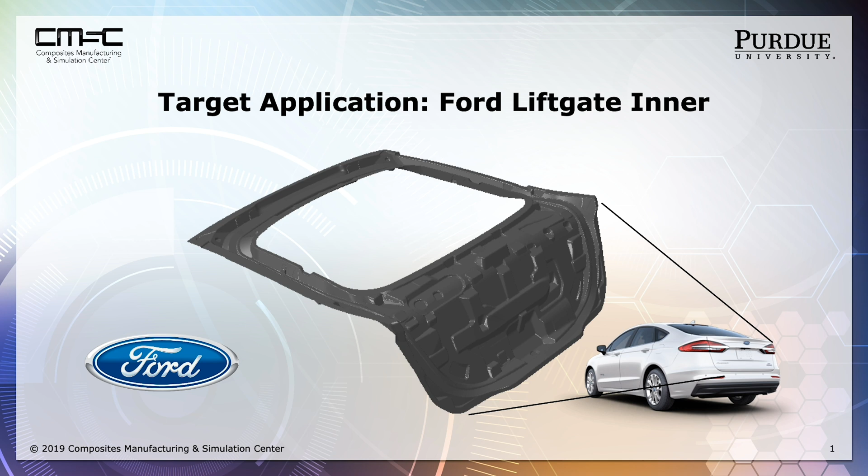Purdue-CMSC worked with Ford and Dow Automotive to develop a liftgate for a future SUV from carbon fiber composites. The goal of the project was to reduce weight while producing a structural part in less than 3 minutes.

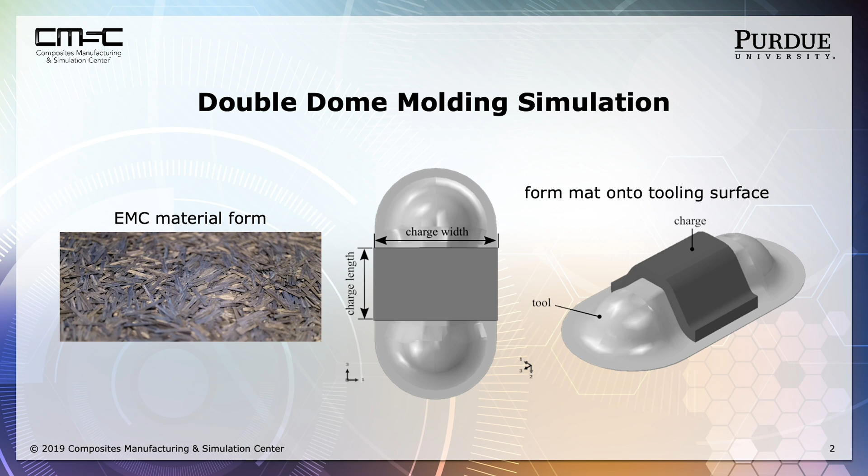Dow Automotive provided rapid cure epoxy systems, and Purdue guided the development of a molding compound with a balance of high flow characteristics with the strength of aluminum.

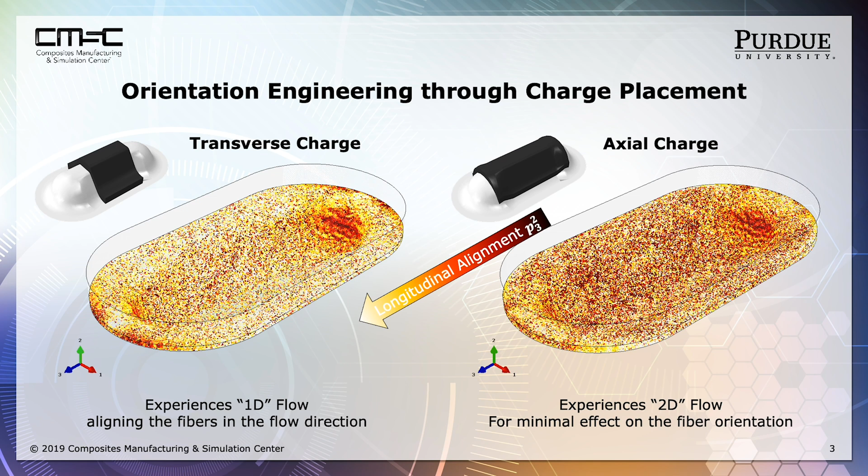Flow simulation at CMSC succeeded in modeling anisotropy and viscosity of these new material systems and in optimizing charge patterns within large compression presses typical in these systems.

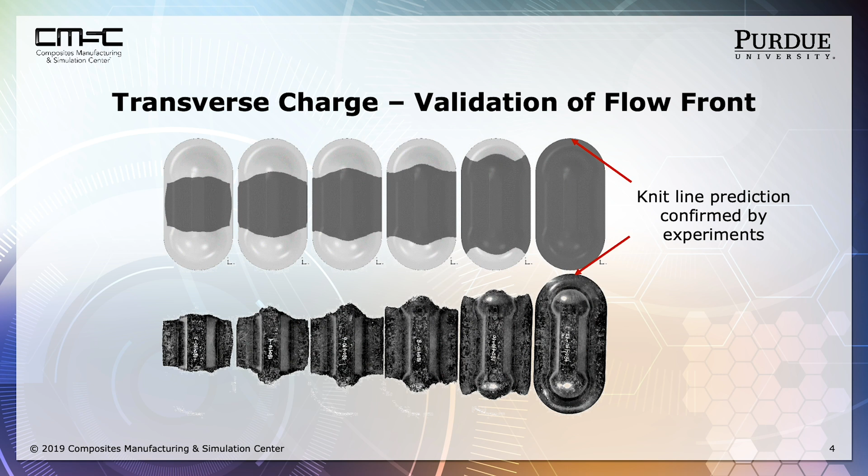The first liftgate prototypes were molded at Continental Structural Plastics in Huntington, Indiana, while CMSC's partner at the IACMI scale-up facility in Detroit, Michigan, provided multiple molding study results.

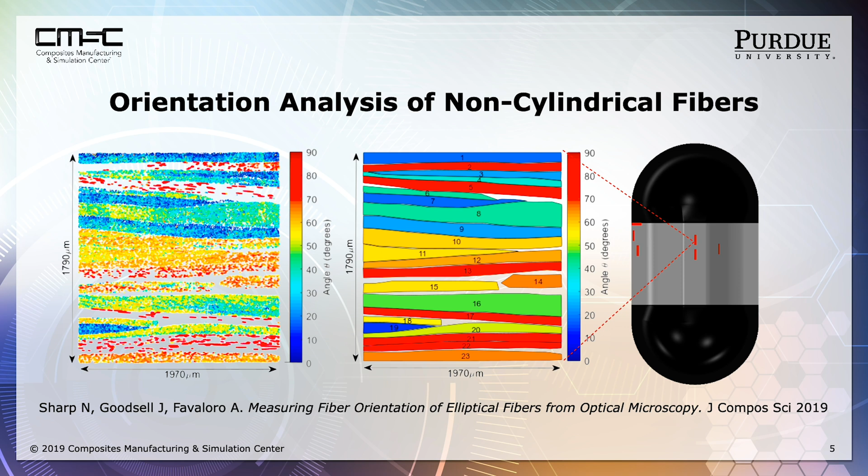The project made Dow Automotive Systems a PACE Award finalist in 2018 for processing speed and recyclability needed to utilize carbon fiber composites in mass production.

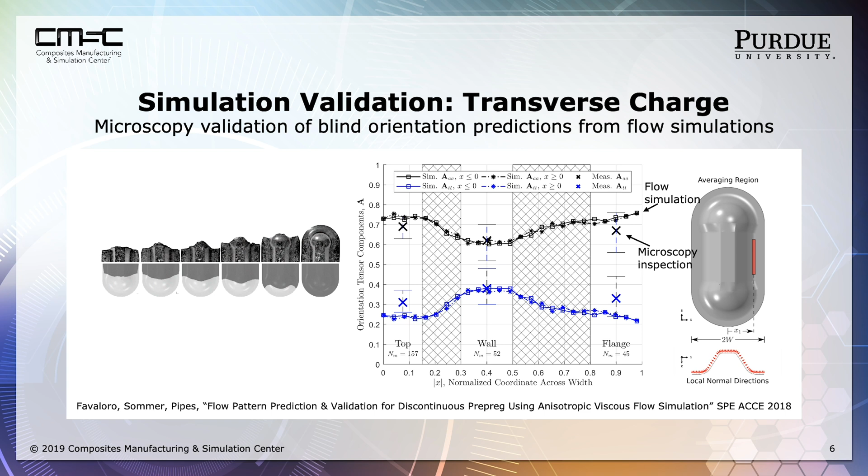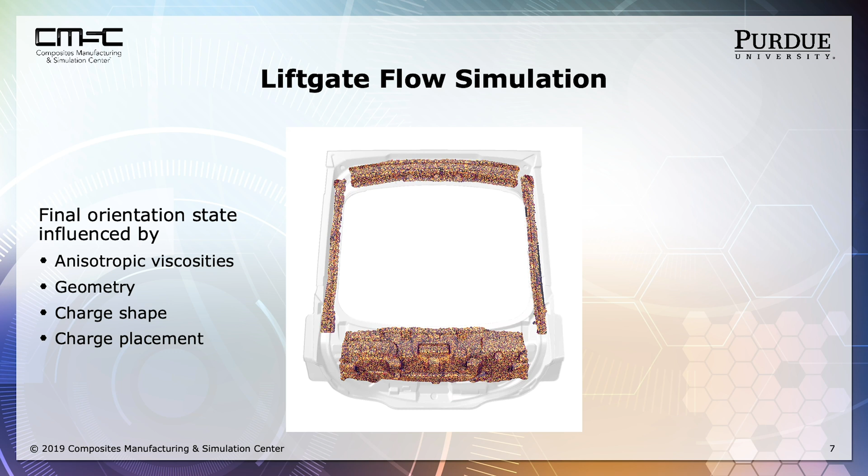The manufacture of carbon fiber composites with compression molding requires the machining of molds, typically in steel, of identical geometry as the desired part, and cost of these molds can be prohibitive when multiple part geometries must be investigated to achieve optimum geometries. The virtual twin concept can predict the optimum mold geometry and thereby reduce the cost significantly.

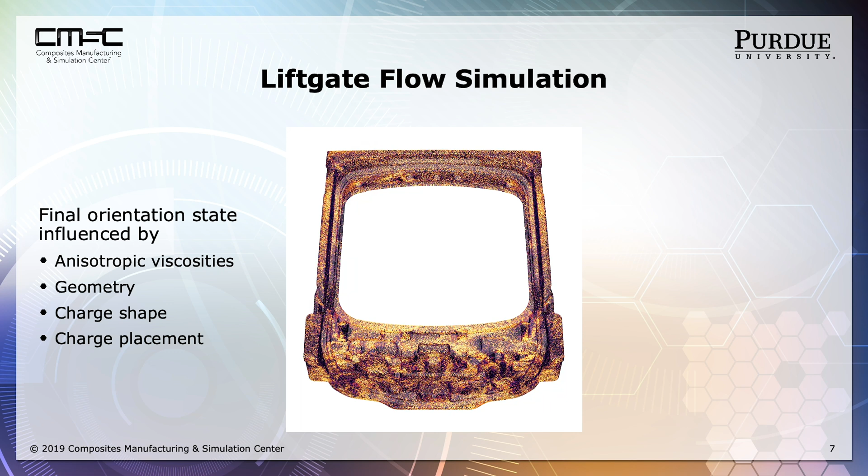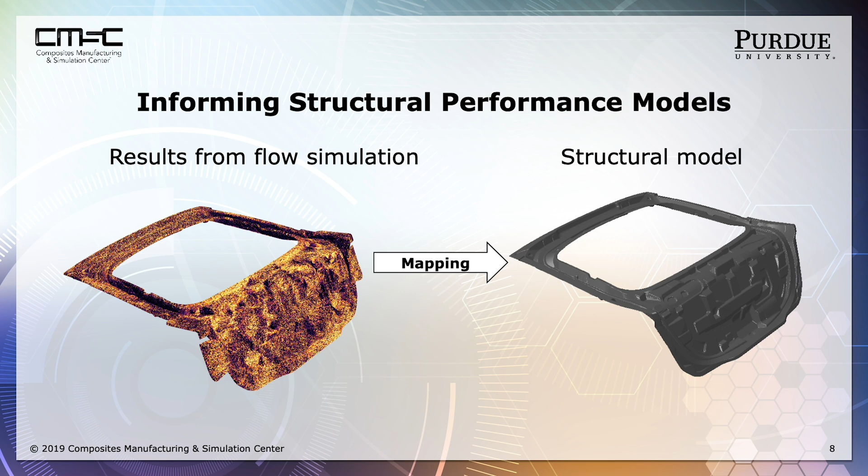A second development presented earlier is composites additive manufacturing. This process allows printing of the molds to achieve prototype geometries at significantly lower cost and mold production time.

The major cost, however, in developing new composite products or materials is in the expense of testing thousands of material samples to determine design allowables.

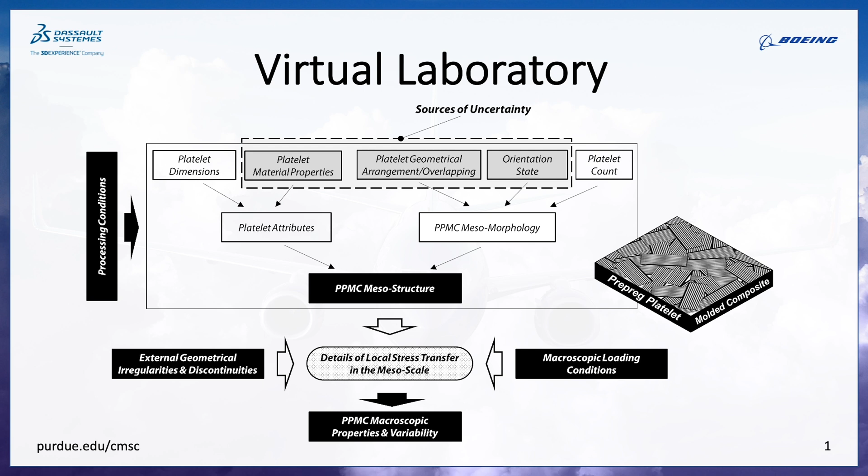Virtual allowables offer the opportunity to provide these data through digital twins of accepted test methods administered by standards organizations like ASTM, SAE, and others.

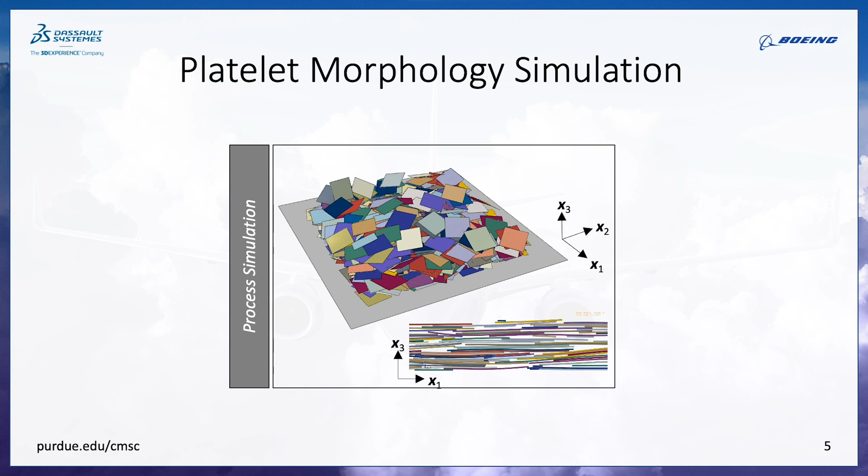The digital twin reflects the variability of the material microstructure on its properties and produces statistical property data that can be merged with real data to yield design allowables at half the cost.

The flow of carbon fiber filled thermoplastics in the melt state is highly anisotropic, so that the flow directions and orientation state of the fiber suspended in the polymer can change with flow direction.

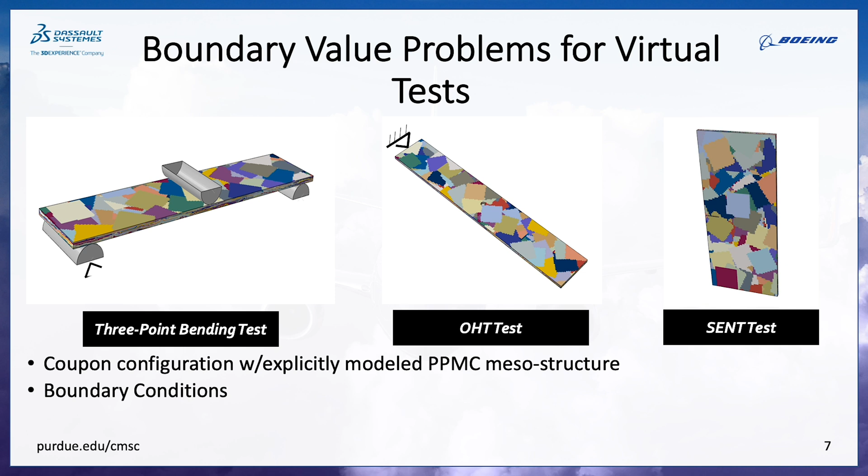The Dassault Systèmes Smooth Particle Hydrodynamics option within Abaqus and 3D Experience provided the platform for the virtual twin of this complex flow in these molding simulations.

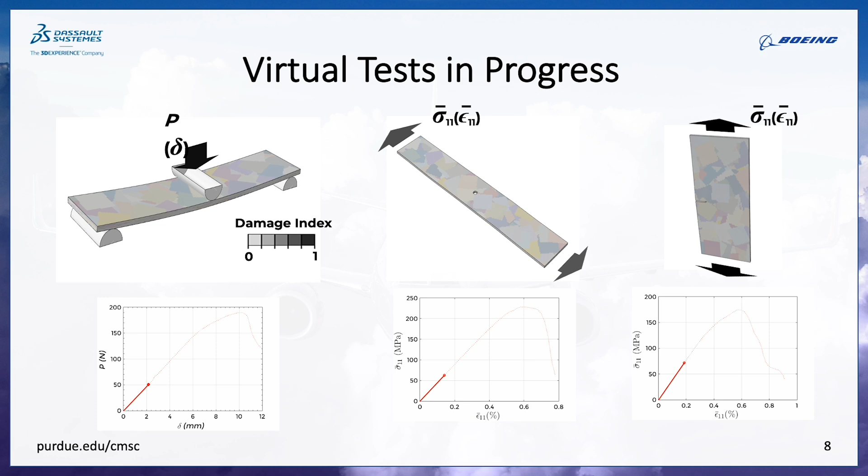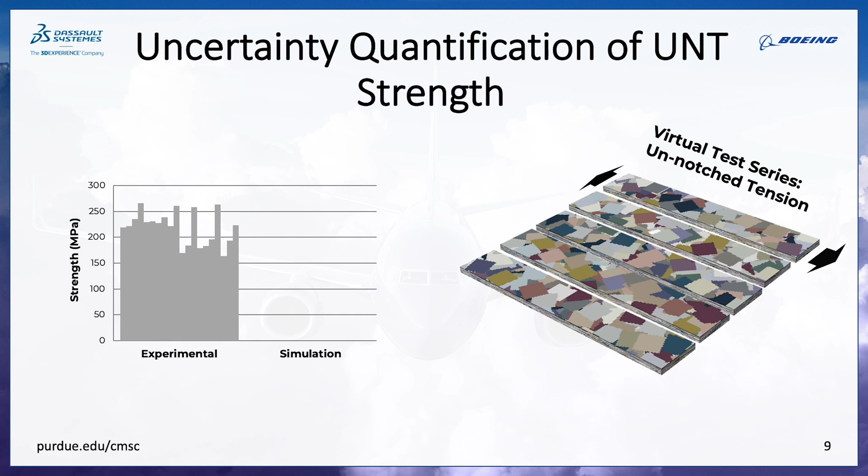The molding of a typical mechanical component for aerospace application shows that each platelet within the material can be followed throughout the flow process, and the resulting orientation state, when compared to X-ray computer-aided tomography scans, shows very close agreement between scan and the virtual twin, and thereby validation of the simulation.

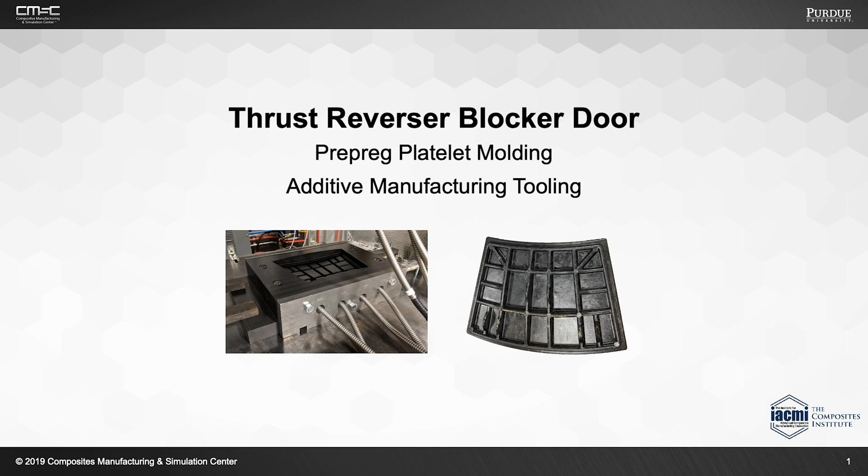The thrust reverser blocker door for a gas turbine jet engine is a complex structure that slows the commercial aircraft on landing by diverting the thrust of the engine laterally.

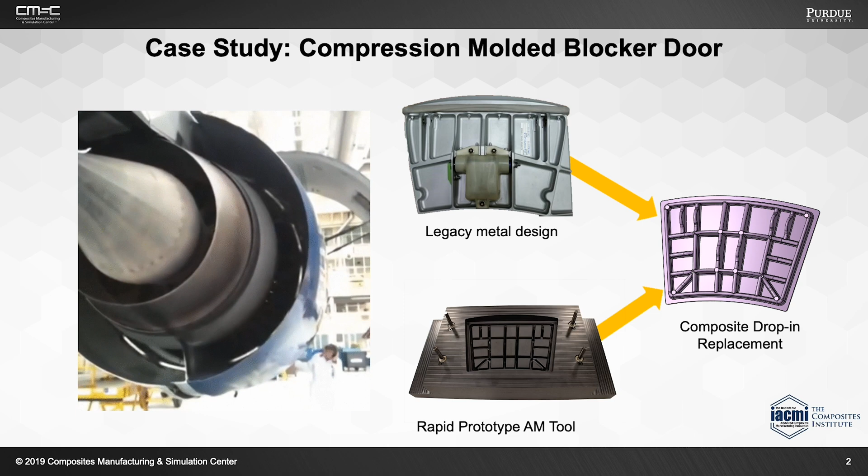The virtual twin for the manufacture and performance of the blocker door illustrates the significant advantage simulation provides in transforming this product from the conventional design to one in advanced composites, and thereby achieve weight savings and reduce costs.

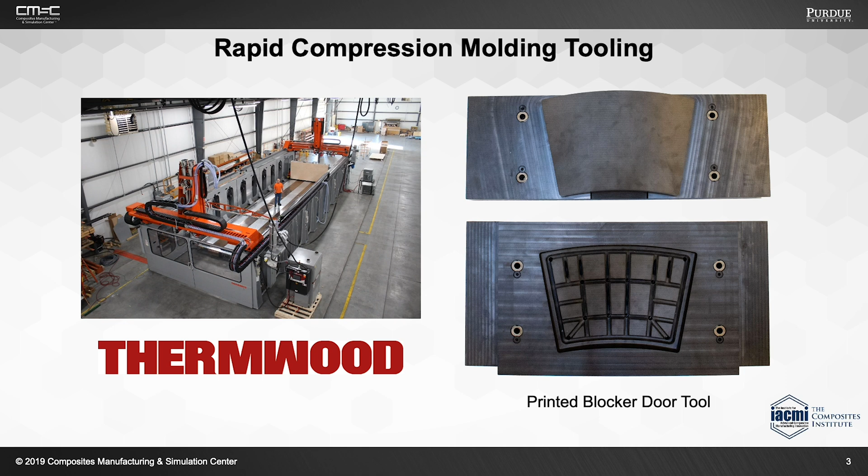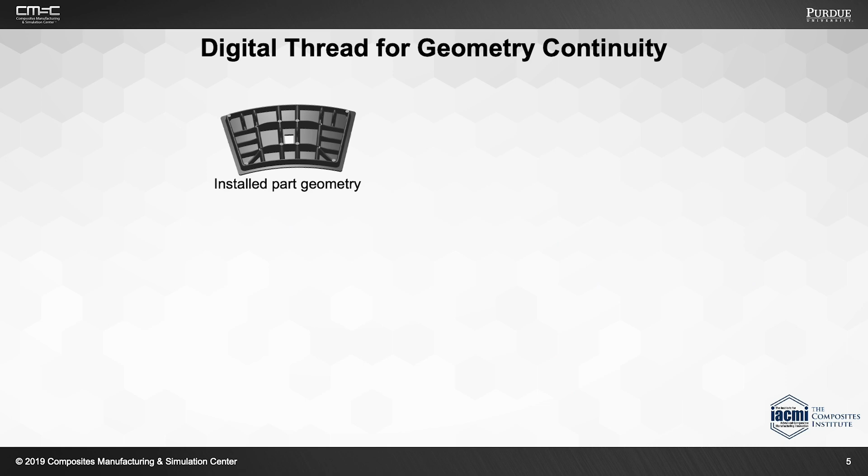Not only can the design of the blocker door be developed as a digital twin, but the development of the prototype molds as illustrated by a joint project with Thermwood. In this project, the print direction of vertical versus horizontal was considered in the digital twin.

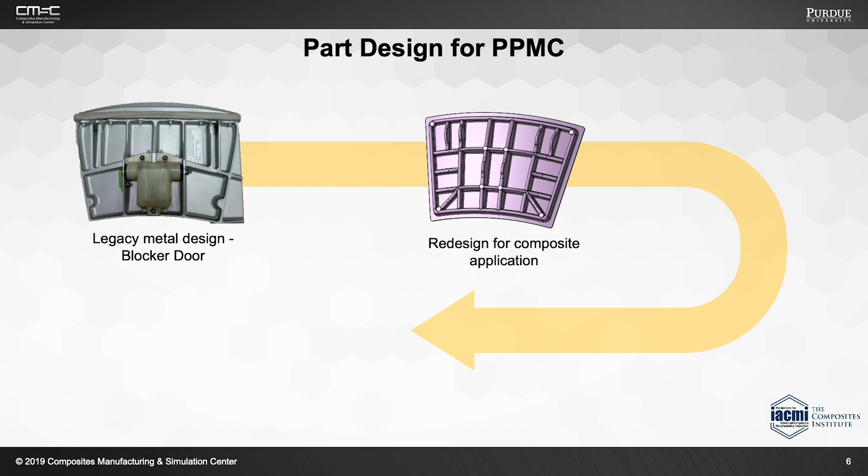Next, the transfer of heat into the mold was examined to determine the uniformity of temperature inside the mold when heated by the platens of the press.

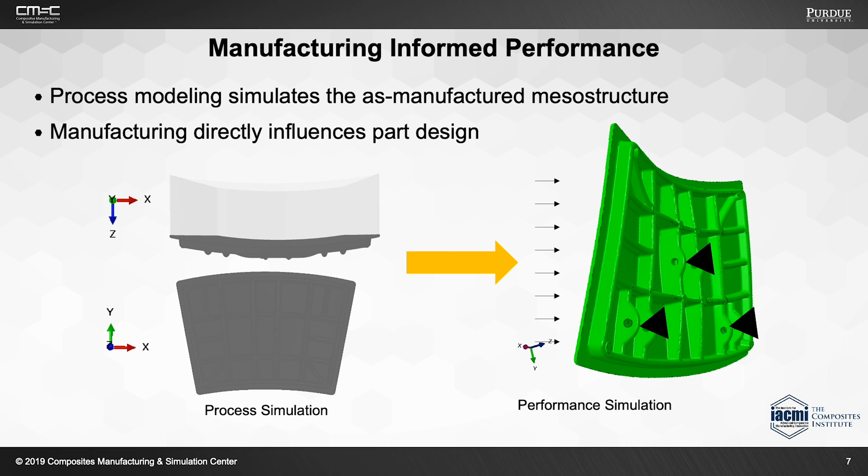On determining from the digital twin that the temperature distribution was unacceptable, the simulation of cartridge heaters inserted into the mold led to the final and correct molding conditions.

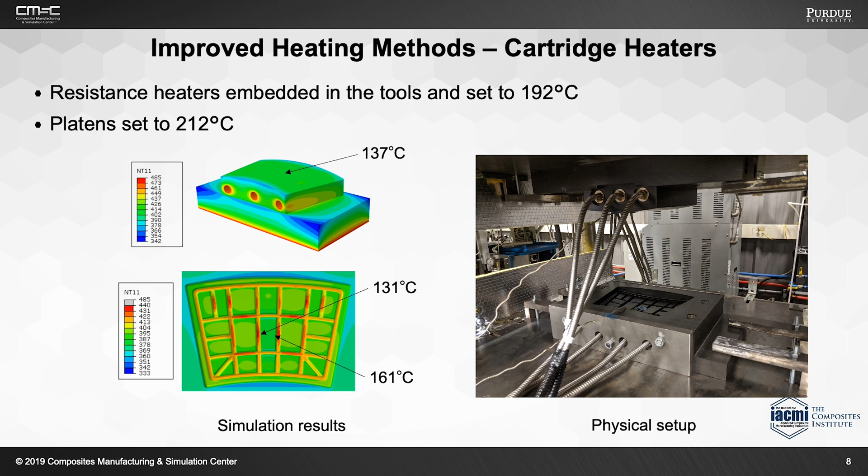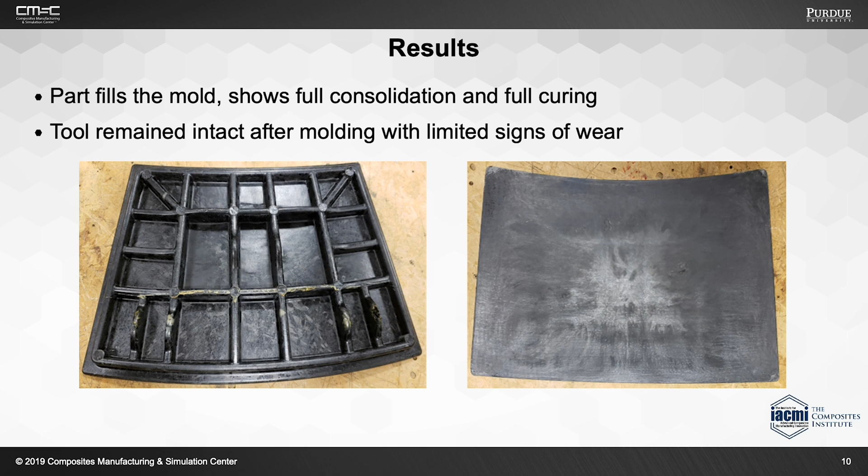The final blocker door prototype was successfully molded in an additively manufactured composite mold. This success was both a breakthrough in technology and a demonstration of the power of the digital twin in new product development.